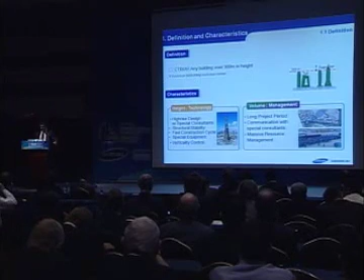But most importantly is the management aspect. These projects take a long time to build, and communication with the consultants is extremely important. They require a massive amount of resources and management that all has to be done in one set.

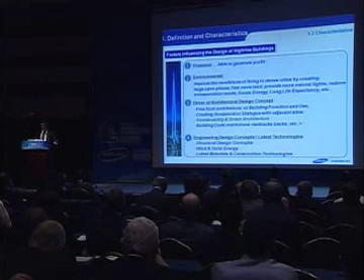The factors that influence the design of tall buildings, from my perspective, include financial: they have to be able to generate a profit. Environmental: to improve the living conditions in dense cities by creating large open plazas, free more land, provide more natural light, reduce transportation needs, save energy, long life expectancy. All of these is a formula for dense and concentrated cities with tall buildings.

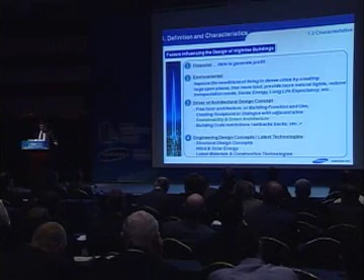But today, some of the things that drive the architectural design concept, and we have to think about: is it really free-form architecture? Or is it creating sculpture? Or is it the sustainability aspect? Or is it the building code requirements and restrictions? Engineering design concept and some of the latest technologies: structural design concept, wind engineering, solar energy, latest materials and construction technologies. How are we designing tall buildings?

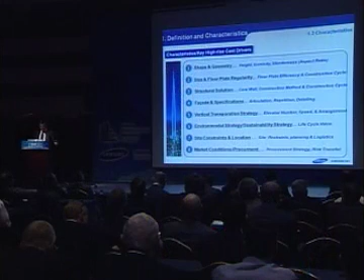Some of the things that influence the cost of tall buildings, because ultimately you can try to design tall buildings, and if it's not economical, it will never be built. Shape and geometry are important. Size of the floor plate and regularity is important. Structural solution is extremely important for many aspects. Facade specification, vertical transportation, environmental strategy, site constraints, and the market conditions, and how we do them.

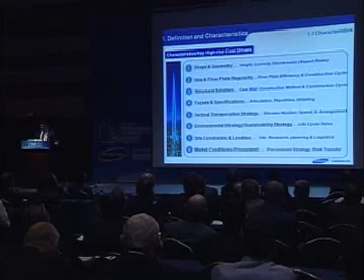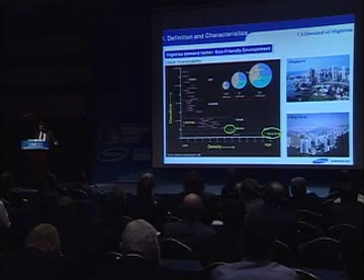Many of you have seen this slide and probably got tired of looking at it, but one thing we need to remember: denser cities tend to be more sustainable. As you can see, going from Hong Kong to Singapore to Monaco.

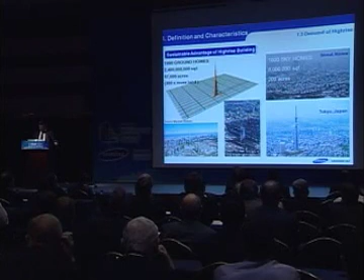And this is a study that was done by Mr. Marshall Strabala, looking at if we take all the areas in the Burj Dubai and spread it out, what does it mean? We can no longer spread cities horizontally. We have to concentrate. We have to create buildings within the fabric of the existing city and go up and stop going horizontally.

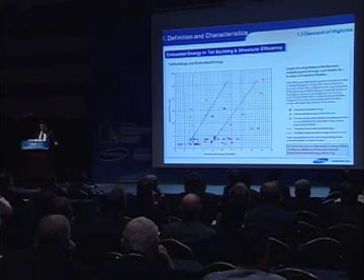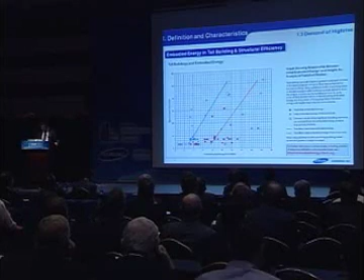One of the things that we don't focus on a lot is the embodied energy in tall buildings. Tall buildings require a huge amount of material, and the material that is needed the most is related to the structure. Everything else, as you can see here, remains constant. But as we build taller, buildings use more structural material. So the question is, how do we optimize the structure?

Gravity load management is extremely important. That has to be fundamentally embedded into the architectural design concept. Wind engineering management and treatment, seismic engineering, performance-based design, and also vibration control of tall buildings, and integrating it with the construction method. And today, we have structural health monitoring to give us more than we ever dreamed about because of computer technologies, and utilization of advanced materials and sustainable energy.

Generally, as most of you know, in order to design a building efficiently, we need this much material. And for wind or seismic or lateral forces, depending on the building size and the structural system, it could result in a huge amount of material. For me, the challenge has always been, how do I bring this line to that line? And that by itself is a good balance and a good structural concept.

We pioneered a lot of structural engineering, the chart by Fazlur Khan. It's about the most economical design. He developed systems such as the bundled tube system, which is rarely used.

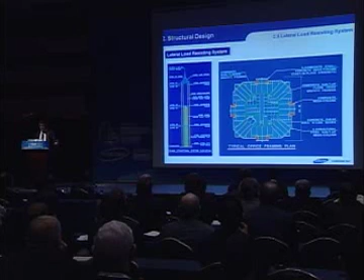And lateral load resisting system, for example, in the Jin Mao Tower that I worked on at SOM with Mark Sarkisian and Bill Baker and Stan. Again, looking at the integration of these systems, and Adrian, again, you can see the integration of the structure and architecture, and it results in an extremely efficient building with a minimal amount of material.

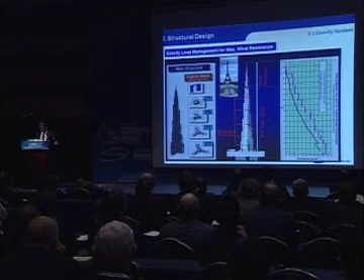Burj Dubai is the same story. How we manage the gravity load system and design. For example, if you look at the total material that is needed for gravity alone to support the structure is that. And because of minimum sizes, this is the total material we used in the building. Essentially almost minimal. No penalty for lateral loads.

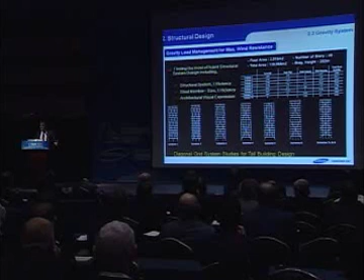We talk about bracing, diagonalized bracing. People hated it for a while, and now they're coming to it again because of requirement. Again, it has a lot of challenges in terms of design. And we've done a lot of things in this building. This is one of the research studies I did at IIT. It's about a 250-story building, which is about half a mile high.

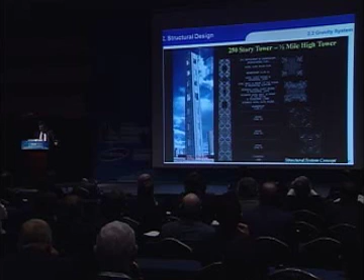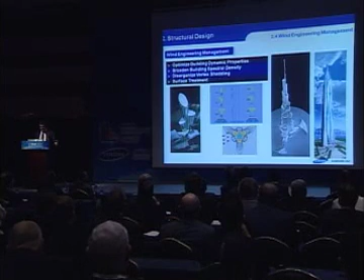Again, if you look at the design of it, it's extremely efficient, and it uses a mega frame system in a very elegant way. Wind engineering management is extremely important, we talked a lot about that. Obviously, it requires optimizing building dynamics, disorganizing vortex shedding, surface treatment,

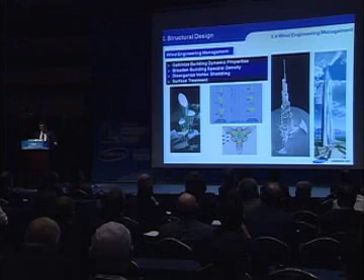and as you can see from the evolution that Mr. Adrian Smith talked about, this building in particular, Tower Palace 3, when we tested it in the wind tunnel, it did not show any vortex shedding whatsoever. The building was so quiet, and it was the ingredient in developing what we did in Burj Dubai.

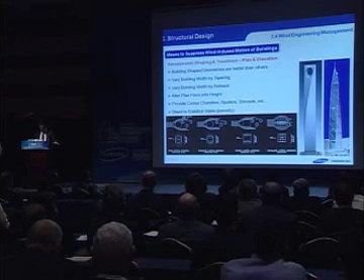Again, we talked about aerodynamic shaping a lot, varying the building width, building setbacks, plans, corner chamfers, bleeds, and so on and so forth. And this is another almost 160-story building that I did with a student at IIT. This is another one, adding bleeds.

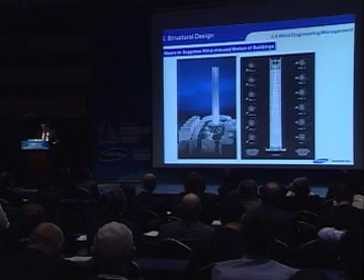Again, from research, looking at Daewoo Tower while at SOM, changing the shape is very important and, when engineering is integrated into the architecture, could actually result in very interesting systems. And today, we're looking at twisted and tapering buildings. They are all excellent shapes to deal with the wind engineering aspects.

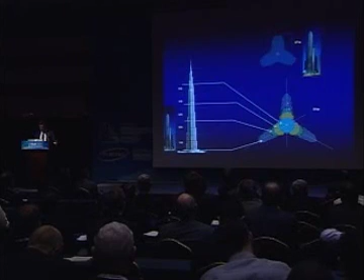Again, without spending much time, Adrian talked a lot about the concept, what influenced Burj Dubai design, essentially what we did in Burj Khalifa. And if you look at superimposing the shape, Tower Palace 3 is over here, and Burj Khalifa is over there. Again, we did a huge amount of input into developing the shape that goes back even to chimneys, in terms of how the spiraling up of the shape is extremely important.

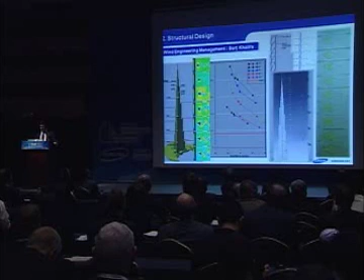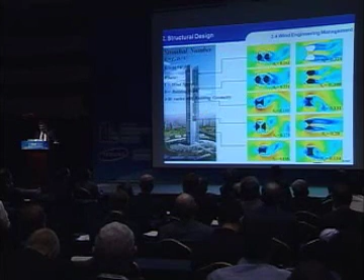And if you look, the frequency of the building is away from every other critical vortex shedding frequency. So the technique for Burj Dubai is used from the bottom all the way to the top of the pinnacle. And that's how we're able to control the wind forces. Computational fluid dynamics now gives us a huge amount of leeway in terms of planning this building. Of course, it cannot substitute a wind tunnel, but it gives us a lot of ingredients of what we can do.

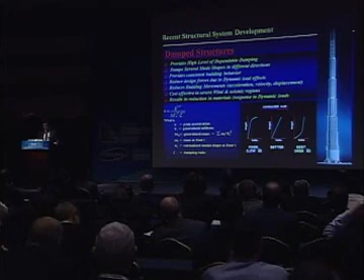The last formula that we don't use often as engineers now, and I'd like to encourage a lot, is damped structures. There are three things that control vibration of a building, in particular the acceleration. One is the stiffness, generalized mass, which is a function of the shape of the building, and the damping. Both the stiffness and the mass require added material. And today, if we can utilize damping, which is becoming very economical and very cheap, I think it's important to consider it, to have more confidence in what we do with these buildings.

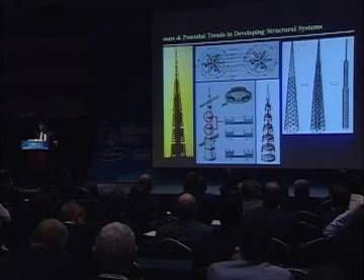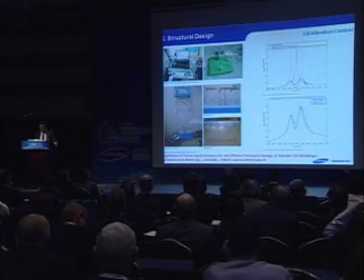Historically, it was used to solve problems. But today, there are a lot of issues coming up, such as distributed tuned liquid dampers. That's the Burj Al Arab, same thing here. From a paper that I've seen in the Council on Tall Buildings and Urban Habitat by Mr. David Lee and Martin Eng, you can see the benefit of the reduction of both the forces and the acceleration on the building related to vortex shedding in a very tall and slender tower.

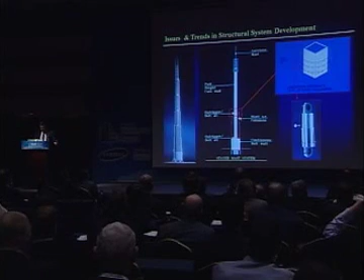We have used damping systems, viscoelastic dampers, viscous dampers, to control relative shortening. You can see this in 7 South, done by Bill Baker, adding damping devices at the end. Tuned mass dampers are used to control wind, but there's not a huge benefit from a seismic standpoint.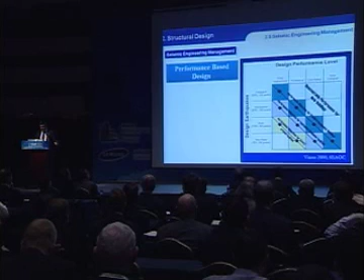But today, what we should be facing is performance-based design. If you look around the world, there's a huge amount of damage resulting from seismic engineering. We, as engineers, are developing buildings that are not sustainable. The damage is not acceptable. I think we need to change the way we do buildings, make them perform, make them stand the test of time, and including a performance damping system becomes very important. It has a huge benefit.

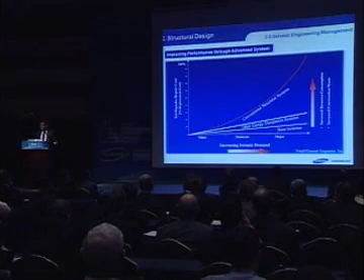If we do a conventional building, this is how much material we typically need. If we start incorporating elements like damping, base isolation, and other dissipation systems, we come up with a cheaper and more economical design that is sustainable. For me, containing the damage in a building is more sustainable than anything else we've talked about. If you look at Haiti or Japan, and all the disasters that have happened, how do you recover from that? We need to think about that as we design buildings.

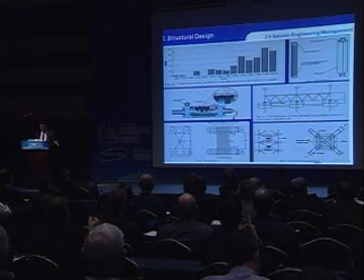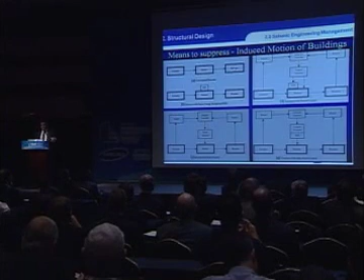Technology is here: inverted pendulum dampers, viscous dampers. Initially they had very little use. Now we have a huge amount of use on tall buildings with all kinds of different formulas. Initially structural design was a very simple process. Now it's becoming very complicated, but we have the technology to do it well, with formulas and guidelines. So there's no reason not to incorporate it as part of the building system.

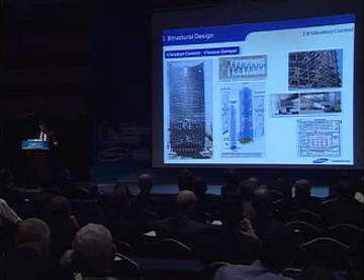This is a building done in Mexico by WSP. It incorporated viscous damping as part of the fundamental building system to control the seismicity of the region.

Today we've started looking at even super tall buildings using mega braces and damping devices that can control the motion and behavior of the building with very little penalty. In a mega frame, when I look at this building without these dampers, it doesn't look as interesting. Adding these dampers adds a lot of interest into the building and makes it a bit more interesting.

This is one of the projects. I had the privilege to work with Adrian Smith, who invited us to work as a contractor providing pre-construction services on this project. I got a chance to put in my two cents worth of ideas in terms of what we can do and how we build these buildings.

For engineers, it's always a question of what is the best solution. Is it steel? Is it concrete? Is it composite? Is it with a damping system? Today we have all kinds of materials to deal with: high performance structural material, high steel, high post-tensioning, fire resistant materials, casting, computer technologies. We have smart systems and materials that can change their characteristics in response to the building's needs, base isolation. Architects are always interested in how to make the building lighter and more efficient, so we need to respond to all of that as engineers.

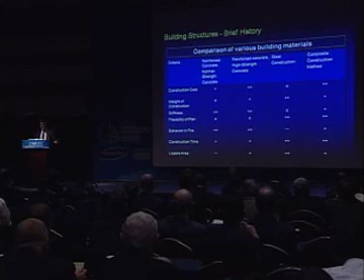Engineering considerations include seismic engineering, extreme events, robustness and redundancy. So engineers, when taking a pencil to design a building, have to think of all these ideas at the same time as working with the architect to develop the whole solution. We can design a lot, but we have to have construction input to find out which is the most economical solution. Somebody has to look at the cost on a real basis, not just a hypothetical one.

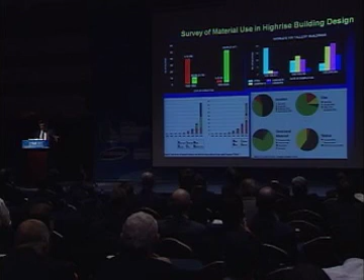We're seeing a drift in the use of high-rise buildings, historically from office to residential, and shifting from steel into high-strength concrete. Concrete, with its ultra strength, modulus of elasticity, mass, damping, moldability, cost effectiveness, continuity, and everything else it offers, has become a very strong competitor with steel.

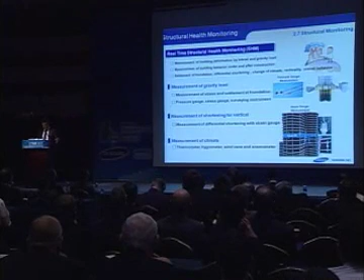Today, we can produce concrete as strong as steel at the turn of the 20th century. More than that, we can know what the building is doing, and compare our design to what we are measuring.

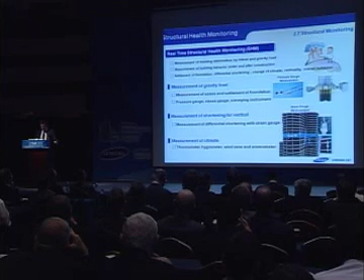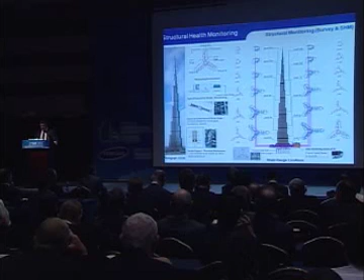In Burj Khalifa, I took it on myself, and Samsung contributed significantly, incorporating a monitoring system for this building to look at the gravity system, shortening, climate, and measurement of lateral displacement, measuring the overall behavior of the building. We installed a significant number of strain gauges to look at the distribution of stresses and strains, and we kept all of these records online, automatically comparing what we measured versus what we predicted.

And surprisingly, the comparison was excellent. Again, structural building survey, online, real time, that was extremely important.

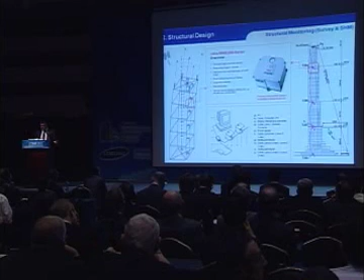How do you control the verticality of these very super tall buildings? So we went the distance in having a real-time survey monitoring program developed, to know at any instant of time where the building is and what kind of correction we have to make almost instantaneously. We measured the foundation, we measured the strains, we calibrated the building, we ran the analysis.

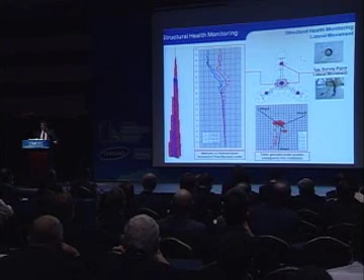Again, the building did drift, and we had to control it. According to our analysis, it was within 5 millimeters difference from what we measured. So it was an exciting thing for us to correlate the theoretical, predicted, to the actual. And we can do it as engineers.

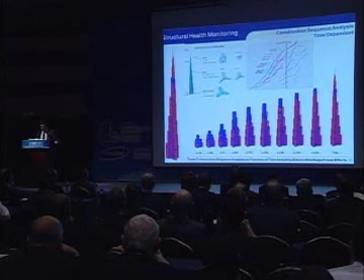In order to accomplish that, we developed in-house at Samsung a very detailed construction sequence analysis program that gave us pretty much everything we need to know, from column shortening to lateral displacement.

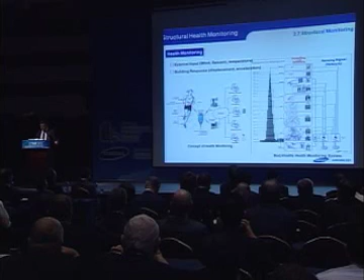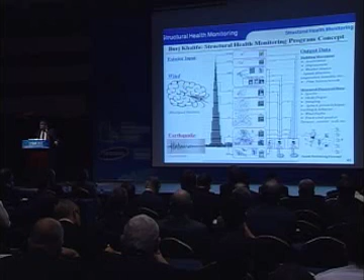And today, we have installed a very structural health monitoring program in Burj Khalifa to measure the building response almost instantaneously. We can tell what the building is doing every tenth of a second. Obviously, we get the output, and we're getting the input, and essentially we are constantly looking at the performance of the building under earthquakes, in real time.

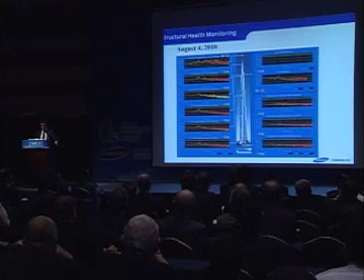We look at the spectral response to see if there's any chance of a change in the behavioral characteristics of the building, and we look at every tenth of a second at what the building is doing.

And again, there are many other issues to integrate: sustainability, cladding, MEP, electrical, vertical transportation, stack effect, and the list goes on. Obviously, I don't have much time to go through these, and every one of them, such as the cladding design, function, and constructability, is important.

Cladding, wind tunnel testing, MEP design and sustainability, electrical design, and the vertical transportation system in particular, stack effects, how do you control it and make sure it's comfortable for people, fire protection, refuge, and escape.

But most importantly, what I wanted to show through all of that is that we can do all these designs, but in fact, the building is more alive during construction than in its actual permanent condition, as you will see shortly.

And with these super tall buildings, if we do not design them and integrate construction with design, we will definitely fail in time and cost, and in the time it takes to build these buildings. So having a construction partner from the very beginning of design becomes very important.

People who have the knowledge inside logistics, planning, equipment, and the major conditions you need to consider in high-rise or complex building structures, jump-form systems, column placement, 3-day cycles, and all the construction techniques you could think of under the sun, to incorporate it and make the building go faster.

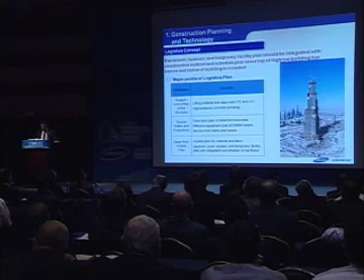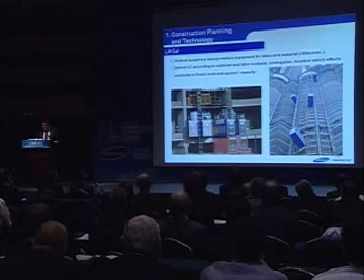Logistics and planning are extremely important. Tower cranes, as I mentioned, lift cars, how do you size them, how do you plan them? And one of the challenges we have to pay for is: is there something we can do with the vertical transportation people to do something special during design to avoid these extra costs? Why do we have to pay this extra?

Labor and transportation management: we have about 13,000 people working on Burj Dubai. KJ came every time he wanted to, asking how do we manage these people to get them up and down to do their work efficiently and effectively?

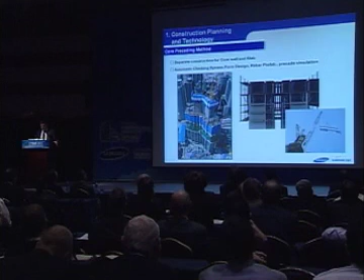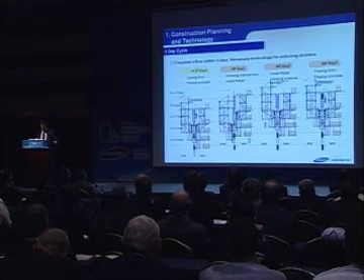But most importantly, jump-form methods and complexities - how do you overcome these using core preceding methods, and how do we speed up from a 4-day to 3-day to 2-day cycle, which continues to be our target. The whole idea is to reduce the construction cycle of these buildings.

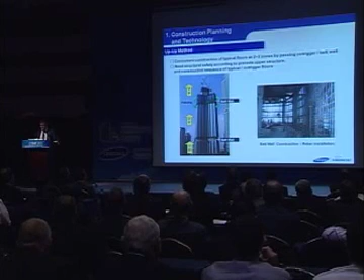For example, the first time we used the up-up method was in Tower Palace 3, where Samsung - I was still with SOM - asked, can we skip the outrigger? Sure, no problem, we designed for it and incorporated it with no stopping. They saved 3 to 4 months in the construction schedule of this building.

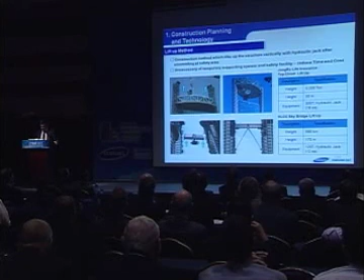Burj Dubai, same lift-up method, where you leave things lagging behind and we go further with it. We have extreme technologies in very high lifting, such as this project in the top cloud in downtown Seoul, Petronas Tower, and also look at the pinnacle lifting in Burj Dubai.

But one of the things we always care about a lot is fire and risk management during construction. As you can see, 13,000 people will be working at the same time, so we have to develop, even during construction, risk factors, egress planning, temporary prevention, safety nets, and safety facilities - there's a huge number of people we have to deal with.

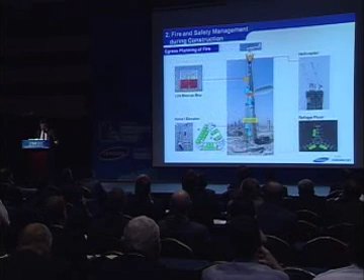Are these numbers more than what we have in a permanent building that has to move people up and down all at the same time? Of course. So obviously one of the challenges to engineers is how can we integrate these into the original design - do we have to pay for it?

The list goes on and on, but because of time limitations I cannot dwell on that too much. Essentially what we have today is a safe, clean space that we achieved in Burj Dubai with very little loss of life or injuries. The site team and Mr. KJ Kim and his team need to be congratulated for the safety record of this project.

Clean technology is also very important, we care about that - I'll speed up. But one of the things I wanted to mention is that we are designing big cities, and now what we have is what's called the solar chimney.

The question is, when we're designing these very large and new cities, why not incorporate this into the design concept? One thing that comes to mind is this solar chimney concept and how it generates a huge amount of energy, both solar and wind. One thing that strikes me is the Incheon Tower, for example, a very large development - the architects already started developing that kind of concept. The question is, how do we integrate it fundamentally into the design concept?